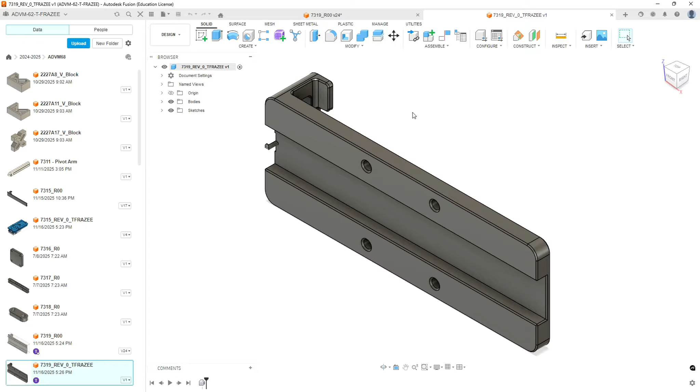Most of our work is going to be facing the top of this. This imported with the front facing what I would call the bottom, so that's the home position. We're going to rotate this so we're looking at it like such, then go up to home, right click on that, and set current view as home to fit view. Now when we return to home, we can return to this position where we can see the majority of the features we're making.

This is very similar to the 7315. It has more features on it, but our approach is going to be similar. You do need to have finished the 7315 programming before you start working on this project. We're going to be copying some of the toolpath from a fairly involved part, so we'll be able to recycle most of what we did on the 7315 part, but we will have to do a bunch of editing and additions. On this one, I was careful to label each of my operations to match a handout that will be ready to download. It's 60 pages.

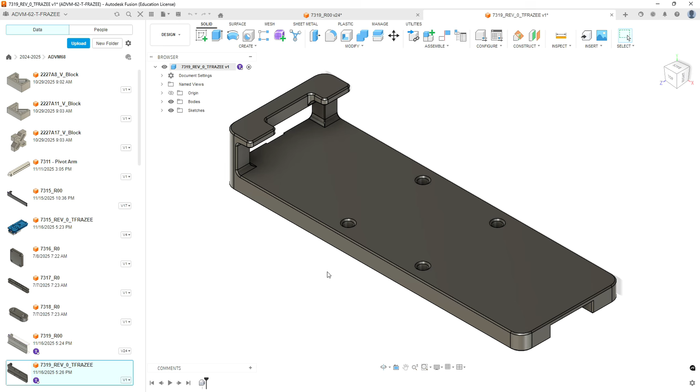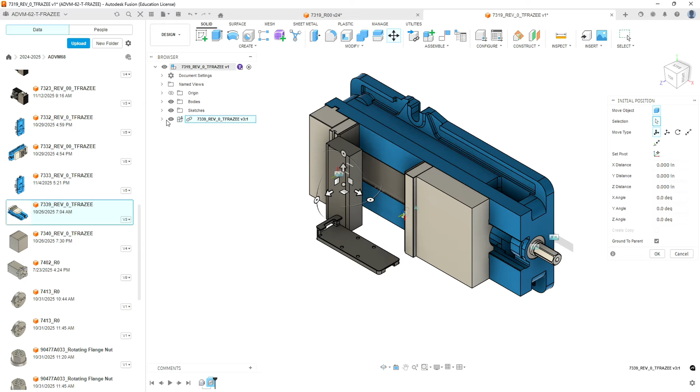So that 60-page document has almost every field, pretty much every parameter filled out. Best practice, probably name your operations the same way I'm doing it, so you don't get lost. This is a fairly involved part, the longest one you'll have done to date. First we're going to set this up with our vise setup and our stock, just like we did on the other one. The 7339 should be the stock for this project, so find that file you used in a previous project and bring it into our model space.

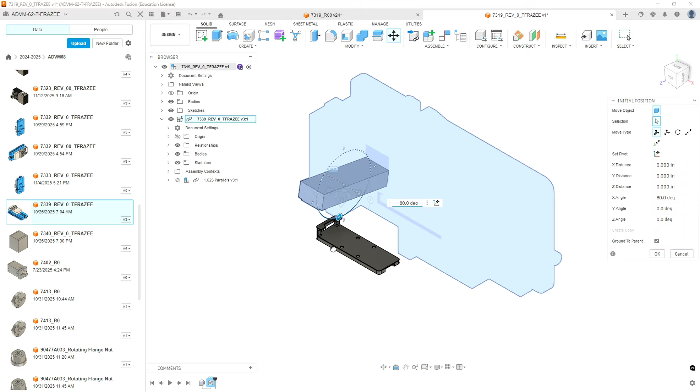It includes the stock and the vise. We don't need the vise, so we're going to hide that, expand the model, hide the vise, and then orientate this dovetail as if it's facing down. We need to rotate 90 degrees in one axis, and then 90 degrees in this axis, and we'll have the rough location of our stock.

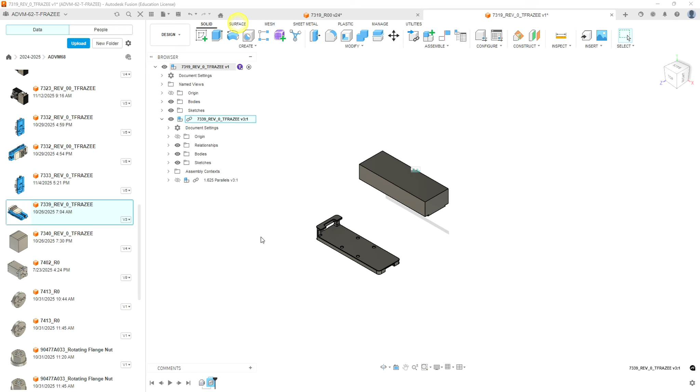Hit OK. Now, if anything comes in, like this has a little anchor on it, that means ground to parent. You need to right click on that and unground from parent. Now we're going to take a look at how we're going to assemble this together. Just like on the other one, we want this face and this face. We want it embedded so that we're skimming a little bit of material off on the top here, 40 to 60 thousandths, somewhere in that range.

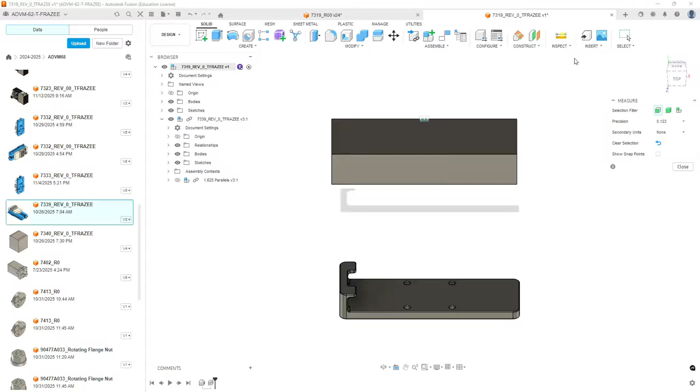So let's do a little inspection. We're going to measure the thickness of this part, and our part is 905 thousandths thick. Our material is inch 180, so let's get our handy dandy calculator out. 1.18 is our stock minus our finish size, which is 0.905. That gives us a 275 thousandths difference. If we want to leave some material on the top to be removed, we're going to subtract, let's put 60. That means we need to shift our piece.

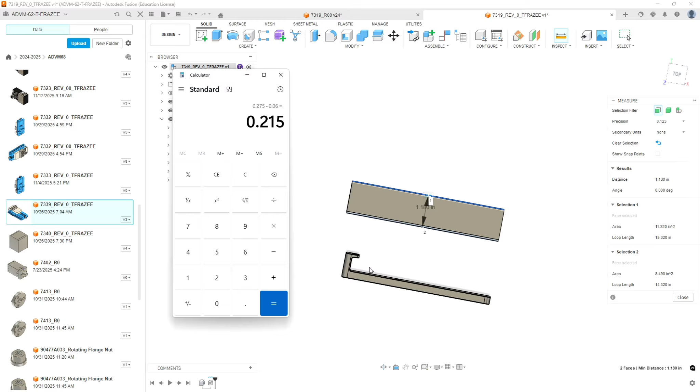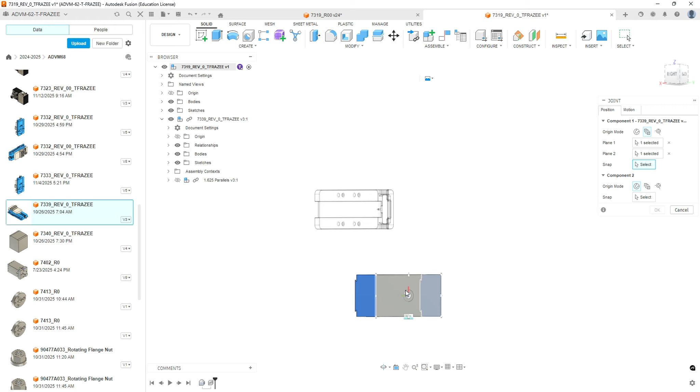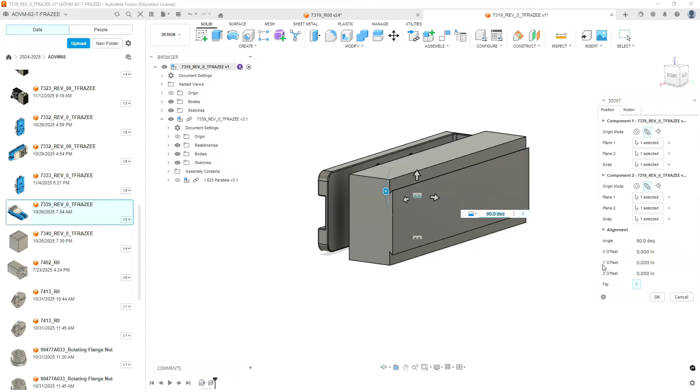If we align the bottoms, we need to shift it by 215 thousandths. We're going to go to joint, do width, pick both sides of our stock, and select point at the top center. Then we're going to go to our second item, also pick width, hover over the top surface, and we want the target to be on this orange plane. As you see, it's just breaking the top, and it should be centered.

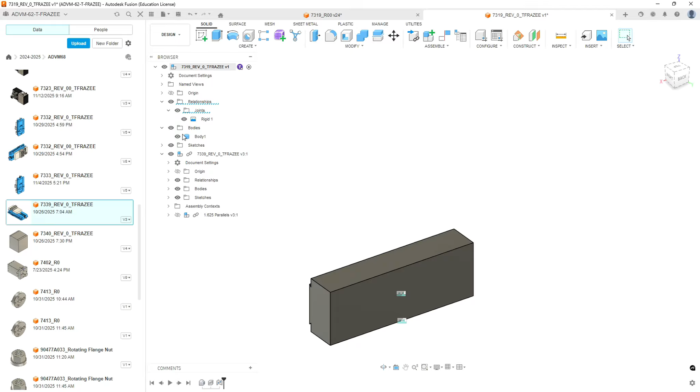We're going to offset by 0.04, 40 thousandths, and we can see that the part's now enveloped in the stock. Hit OK. If we want to, we can select the body of our model and see where the stock falls inside. The goal is to have enough material that we skim off this top, but then we've got as much material as we can reasonably with the dovetail.

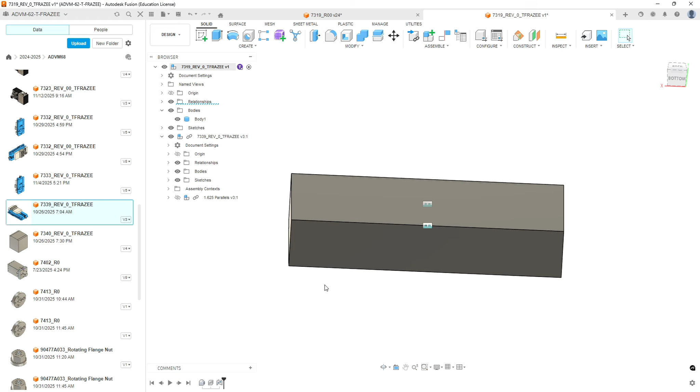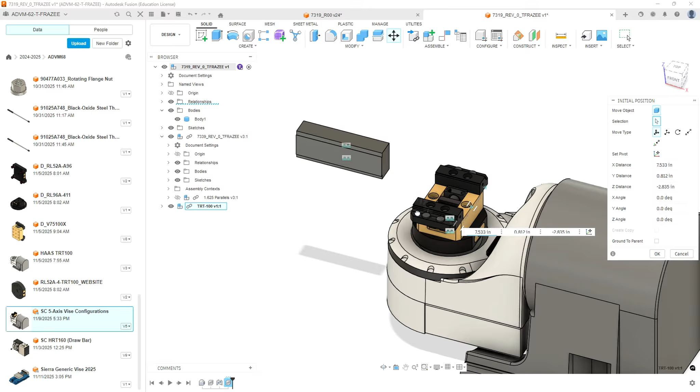We need to set up our fixturing. So we're going to go down to our 5-axis vise and bring that in. The configuration we're going to bring in is the TRT 100, and even though you might run this on the UMC 750, the actual vise is the same, but the clearance issues are more prominent on the TRT, so we'll use that one and assume we have good clearance. We need to orientate this fixture, the 5-axis fixture, in the same orientation as our part.

Okay, about there should be good. We're going to hit OK. Alright, now we're going to do a joint between this and our TRT. Make sure it doesn't have an anchor symbol and isn't grounded. We're going to joint, and we're going to do with.

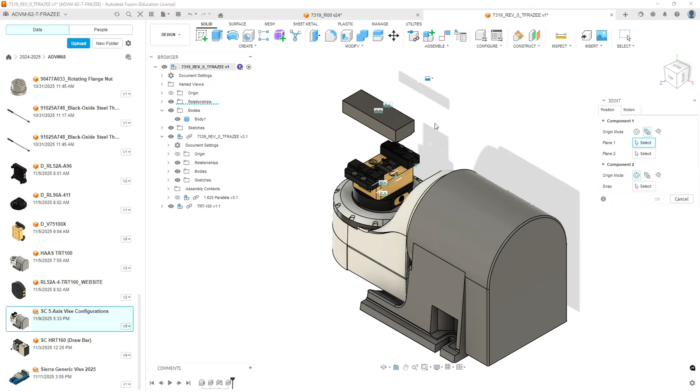We're going to pick either side of the stock body. We're going to select an origin point that's on center of the dovetail.

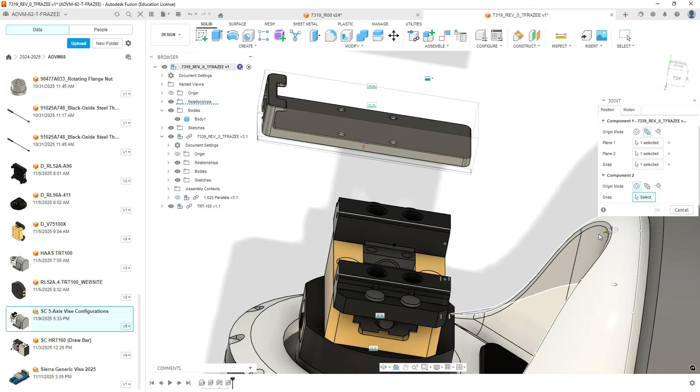And then we're going to select also by with. We're going to pick the large faces on the gold part of the vise, and then we're going to pick this point. It needs to be in the same orientation as on our part.

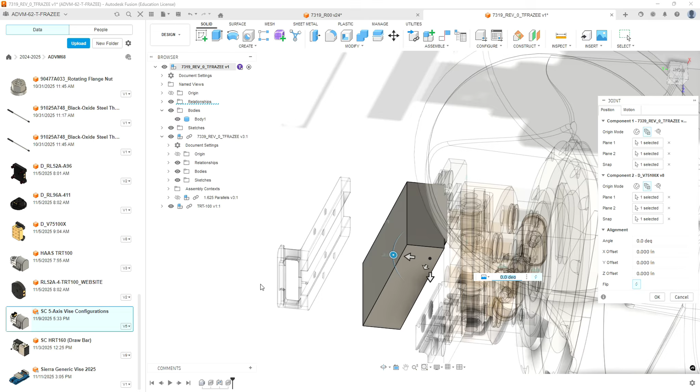So that should bring our part into alignment with the vise. And we're going to hit OK. Or fixture alignment with the part, I should say.

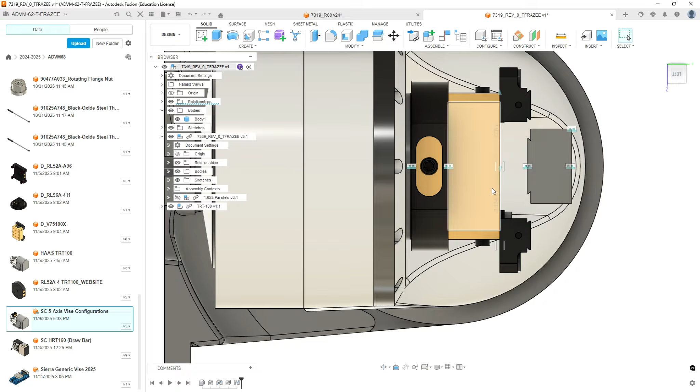And now we need to close the vise jaws. In order to see the numbers, you actually have to look at it from the home position, because for some reason they have to be selected from this side of the part.

So I'm going to double click on that. I'm going to look at it in the left view so I can see what's going on here.

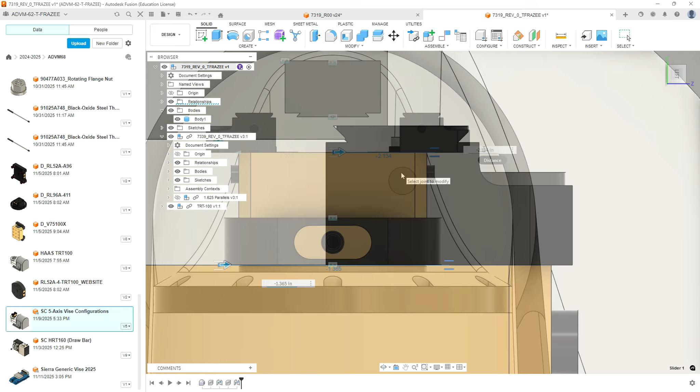Okay, so mine worked out to be 1.37. Yours might not be the same exact size if you didn't model your dovetail the same size as I did. It's not super critical—this is for collision detection modeling.

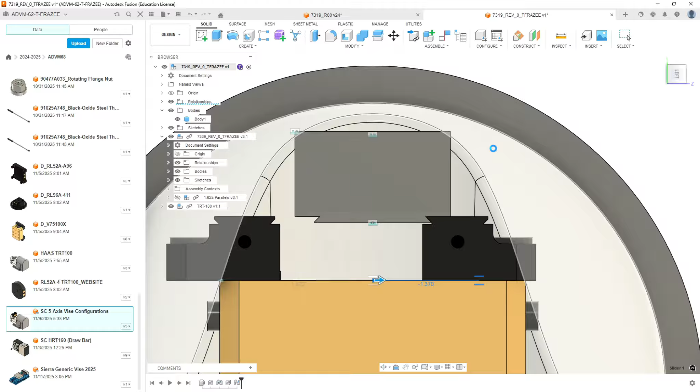Okay, I'm going to accept that, and go back to the home position so I can select the other number, which should be the same value but positive. And double check that it's all lined up.

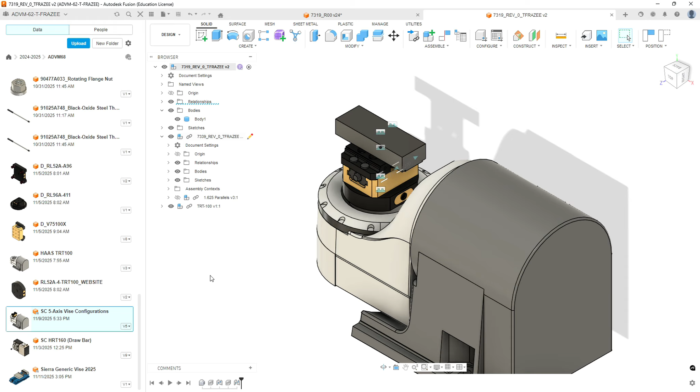Okay, so we have the 5-axis all set up. This part's ready to go into manufacture mode, but let's go ahead and set up our traditional vise for the second operation. So we're going to hide TRT, and temporarily hide the stock body because there's not really much of it left.

And if you recall on the other part, we're going to set this up pretty much the same way, and we need a theoretical point that aligns with where we're going to line this up before we start.

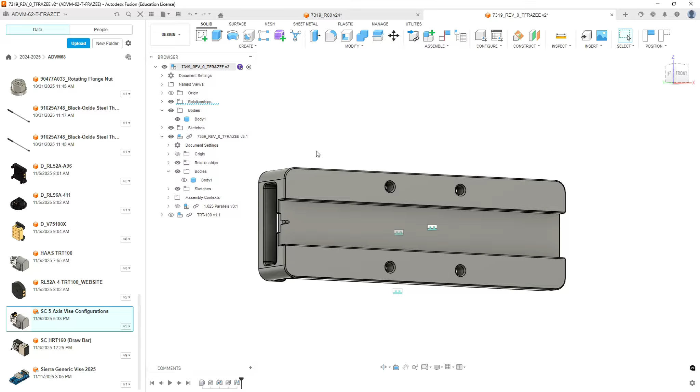So without further ado, we're going to make a sketch, and we're going to capture the position. We're going to make the sketch on the face of the part.

And we need to create a line, and it needs to be horizontal.

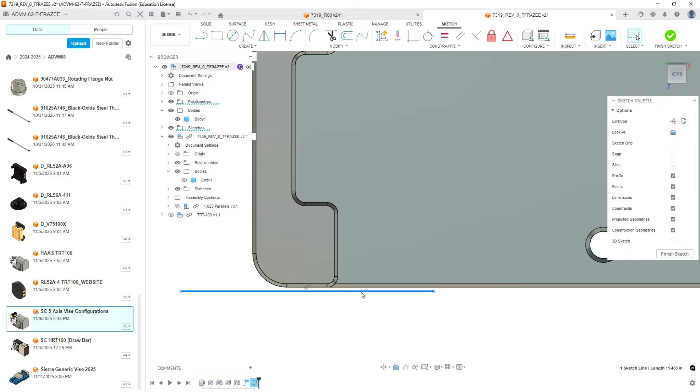We're going to take that line, hold the shift key down, and highlight the edge of the part and the line. And we're going to constrain it collinear to the edge.

Okay, you're going to hit escape to get out of that command. We're going to take the endpoint and make it coincident to this edge of the part.

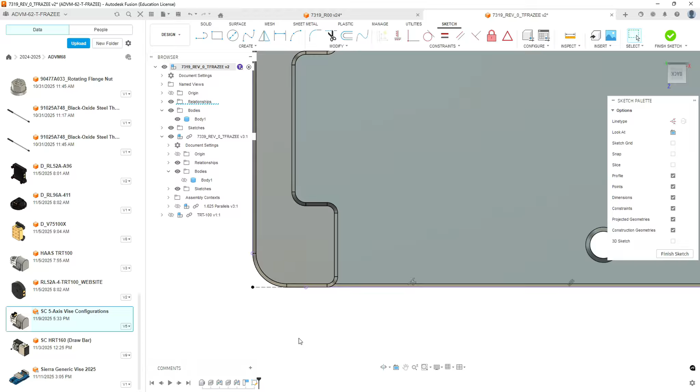We're then going to take the other endpoint and make it hit the midpoint of the edge just to constrain it. Then we're going to left click on the line, right click, and turn it into construction. We're going to hit finish sketch.

And that point we will be able to select on when we're setting up our origin and for assembling on the vise.

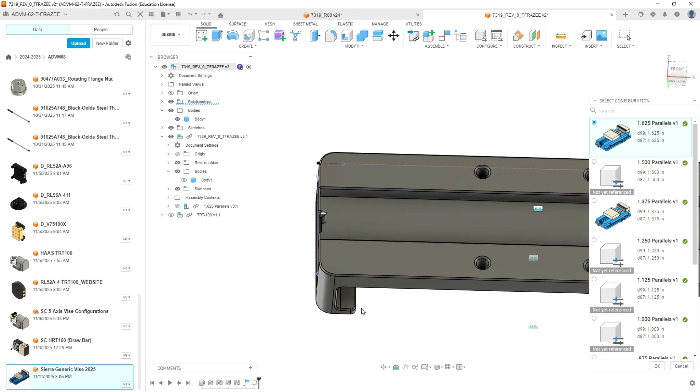Okay, so now let's bring in our Sierra College generic vise. And we're going to use 1 5/8 parallels again.

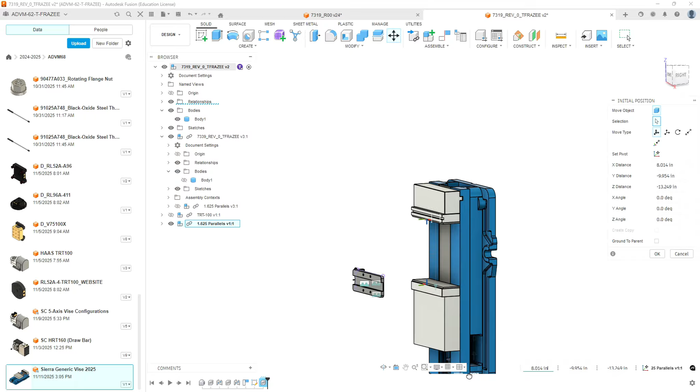Okay, our vise comes in. We're going to set it up again with this L shape hanging off the left side of the vise. Rough position it, hit OK.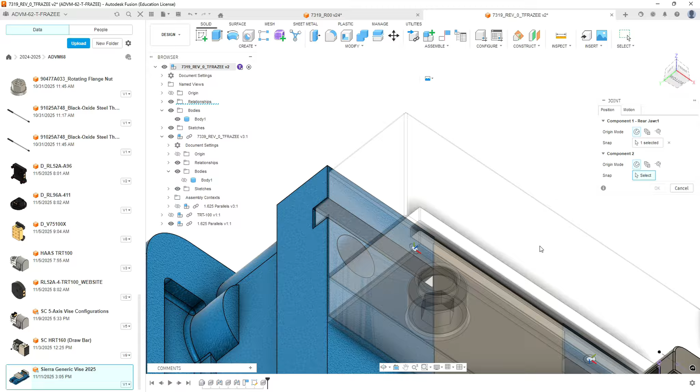Now we're going to go to assembly, we're going to do joint. And we're going to select on our parallel this edge here, corner. And then on our model, we're going to select the point we created.

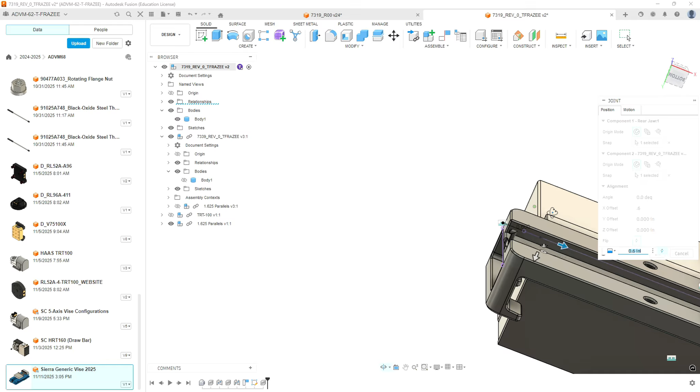Those will come together. Now we can't load it this way because this L shape needs to hang off the edge of the vise. So we're going to move our model by 0.6, that way the piece sticks off the end of the vise.

And you'll have to set up your origin on this with a 1-2-3 block with a stop that's going to touch the surface. We'll hit OK. Now we just need to close the vise the width of our part.

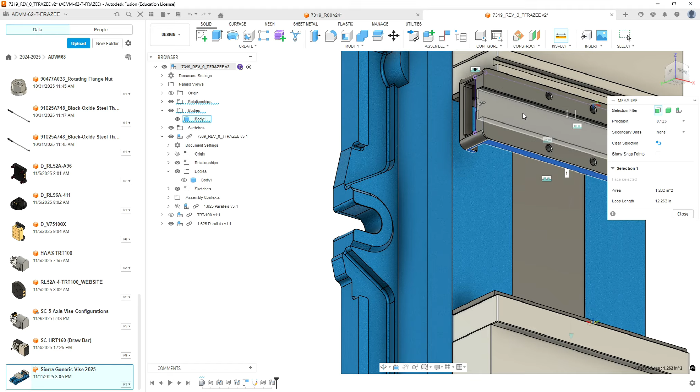So if we inspect our part from this plane to the opposite, it is 1 7/8.

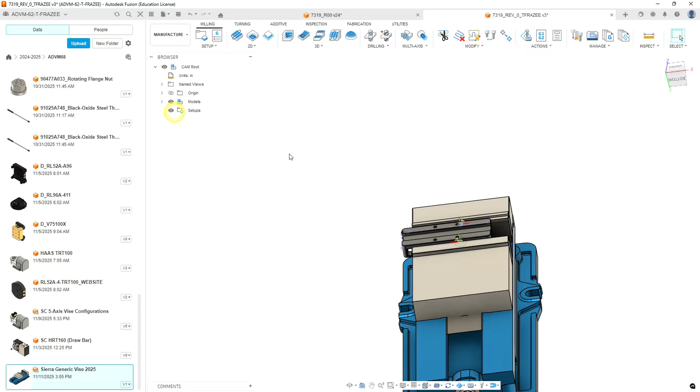Okay, we're ready to go to the machining package now. Let's go to manufacture. We do not want to bring in the data from the stock we machine on the 7339 part, so hit cancel.

We'll look at our part in the home position. Let's expand our models and hide the vise and show the TRT 100, and for now we are going to show our stock. Okay, at this point I'm going to close my data panel, and in our sketches we're going to make this sketch with the dot invisible for the moment.

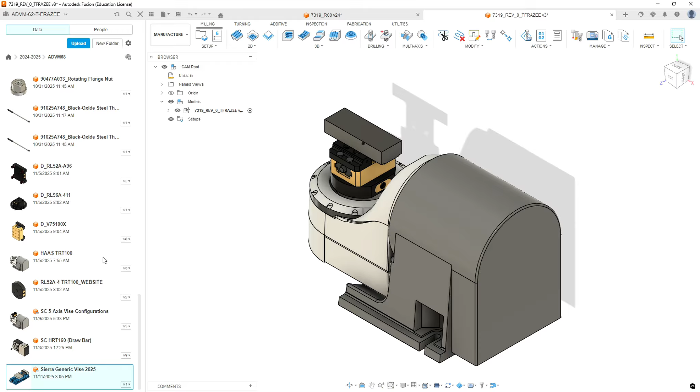Like I mentioned, a lot of the toolpath we did on the 7315 Rev 0 part can be applied to this part because it's very similar. So let's open our data panel that I just told you to close, and we're going to find your 7315 model wherever you've saved it, and open it.

Okay, you want to be in the manufacture tab, and we're going to highlight the entire setup, right click on it, and copy, and go to the 7319. We're going to highlight setups, right click, and hit paste. Now if we expand the setups, we should have it, and it's got a big warning because all of this stuff is tied to a different model.

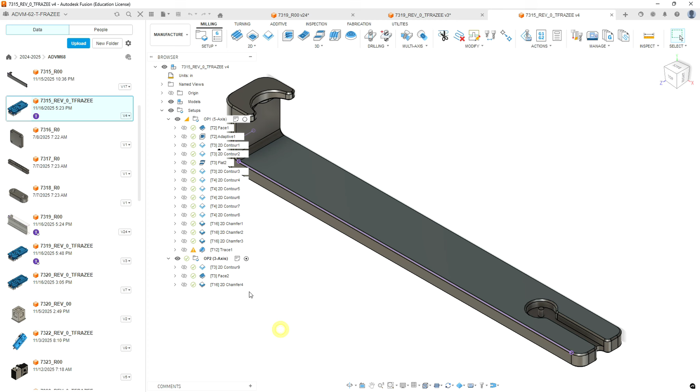Okay, we're going to go back to the 7315, and we're going to copy the second operation. And it's going to have errors as well.

Before we do anything else, what we want to do is fix the setups. We do not want to run the wrong part. So let's highlight operation 1, right click on it, and hit edit.

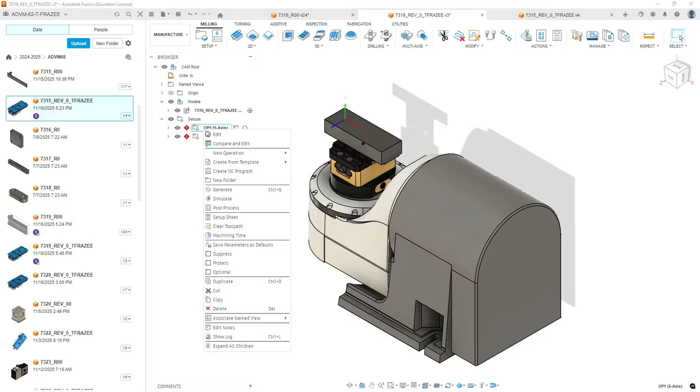The setup tab - all of this stuff is not related to this model. So let's hide our data panel. First we're going to select our Z-axis by picking the top of the part, so that orients Z in the correct orientation. Our x-axis is going to be - I didn't want to pick a face - this edge here. Now my x-axis spun to the wrong direction, so we're going to flip it, and it should be pointing towards the base of the 5-axis rotary.

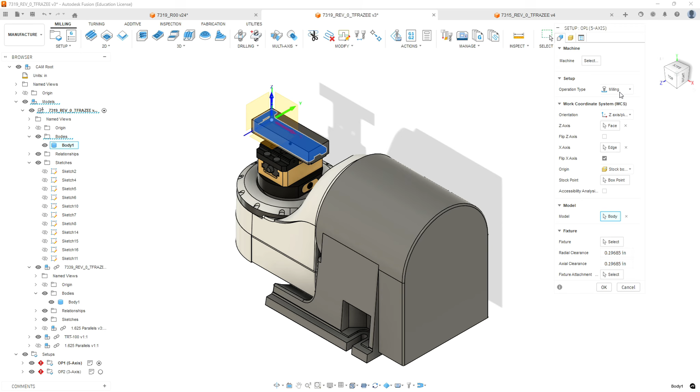Now we're going to set our origin, and it can be set by a stock box point, and we're going to pick on - we haven't defined what our stock is yet or our model. So we want to pick select model, expand our model space, and we want the model itself for the finished part, which is 7319. We're going to select that body. Then we go to the stock tab and select the body of the 7339, which is the stock, and now it snaps to a box point. We'll go back to the setup tab, and if you needed to change the location, now you can.

So it looks like it's where I want it.

That is now fixed. Now we want to go to the Post Process tab, and we want to make sure we're updating this correctly. This is going to be 73191, our program number, because it's a different part. Everything else can be left the same. We're outputting for operation 1, which is 5-axis, and using work coordinate system 2, which is G55 for this operation. Let's hit OK.

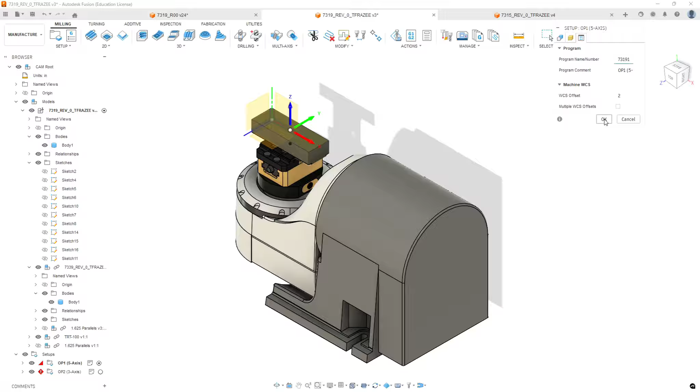Now let's check the notes. What did the notes say? Vice clamping pressure, 60 Newton meters, that's fine. You could put your origin, whatever notes you need there for setup. So that took care of the setup for op 1.

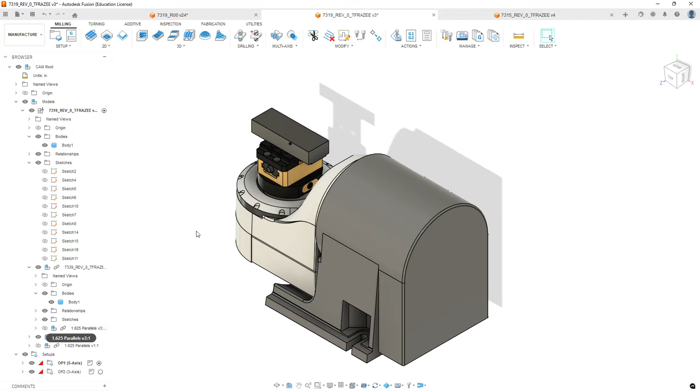It's now fixed. All the toolpath underneath is not. Okay, now let's go ahead and do the same thing for op 2. So we need to make the TRT invisible, and we need to make the vice visible, and we're going to look at it at a 3/4 view. This looks about right. We're going to highlight this setup 2 and pick the radio button on it.

Right click, and we're going to go edit. We're going to reselect our origin, which is the z-axis normal to this face. This edge is x-axis - looks like I have to flip it. And then we need to make that sketch we created with the point on it visible so that we can select that point as our origin point. So again, this is the top of the parallels, edge of the machined finished part.

Okay, we need to select our model, which is the 7319 body 1. We're going to go to stock - we could use previous, that's fine. And then on our G code, we need to change this to the 7319 op 2, and we're going to use work coordinate system 1 because it's G54 and a traditional vice.

Hit OK. Let's double check these notes. The vice says the same thing. Looks like we added parallel height and origin location, which is good.

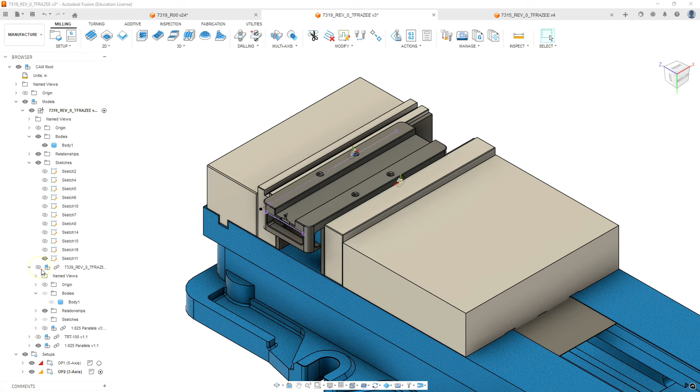On this particular thing, now that we've set the stock, we can make the 7339 invisible. After we make the sketch invisible, we're going to make the TRT visible and make the vice invisible again. Now we can collapse this down, and we're going to go to a home view.